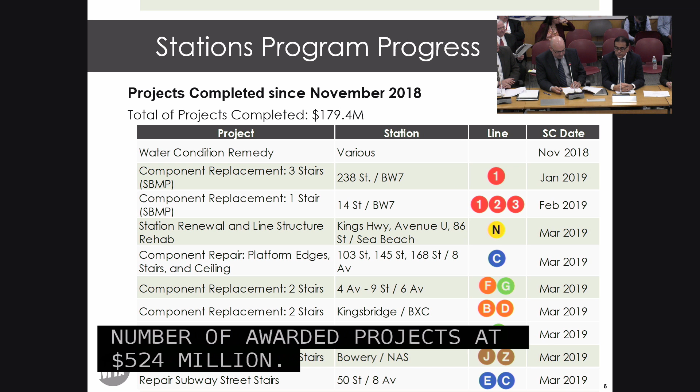This slide shows projects that we've completed since the November 2018 report. Completed projects include 12 stair refurbishment and replacement projects in the Small Business Mentoring Program, and platform edge replacement, stair and ceiling repairs at 3 stations on the 8th Avenue line. Completed projects since November total $179 million.

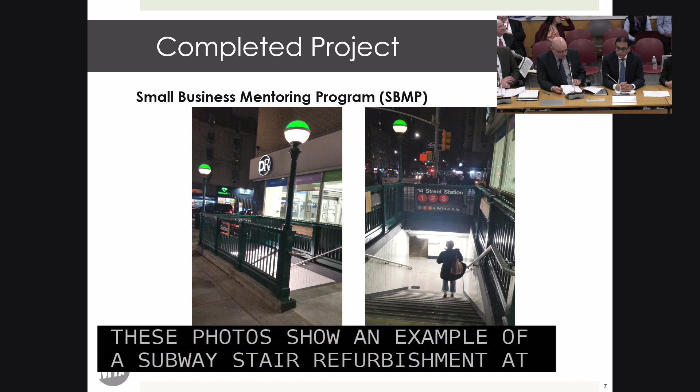These photos show an example of a subway stair refurbishment at 14th Street, Broadway, 7th Avenue as part of the Small Business Mentoring Program. This photo shows an example of an elevated stair refurbishment at the 238th Street station on the Broadway 7th Avenue line, also as part of the Small Business Mentoring Program.

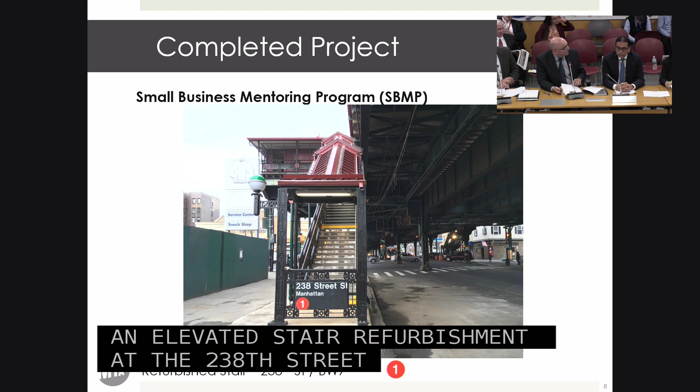This photo shows another example of a subway stair refurbishment at the 50th Street 8th Avenue station, which is also part of the Small Business Mentoring Program.

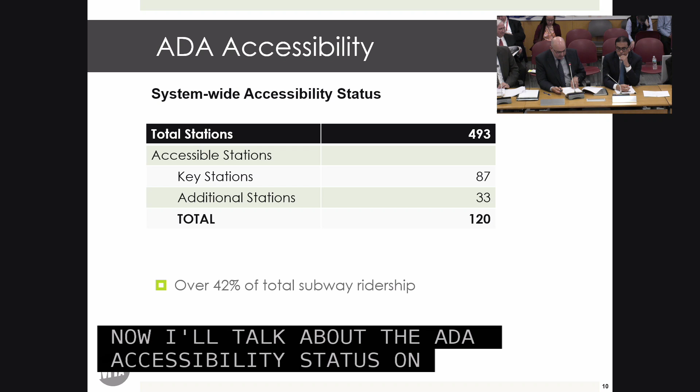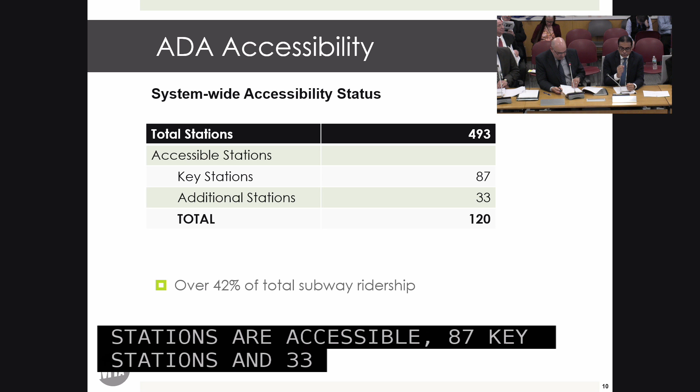Now I'll talk about the ADA accessibility status on these next few slides. Out of a total of 493 stations, including Staten Island, 120 stations are accessible: 87 key stations and 33 additional stations. These stations are utilized by over 42% of the total subway ridership.

For the 13 remaining key stations, 68th Street Hunter College is in final design, and 12 are in construction. Key ADA stations total $883 million.

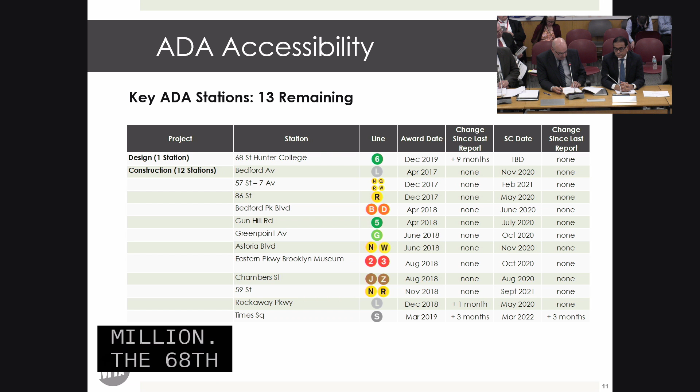The 68th Lexington Avenue station is pending real estate agreement resolutions, as an easement agreement is required with Hunter College for a new street to mezzanine elevator and reconfigured stair within the Hunter College East building footprint, as well as construction agreements to perform construction within the Hunter College property and at 3 sub-basement levels. Negotiations between MTA Legal and Hunter College are ongoing.

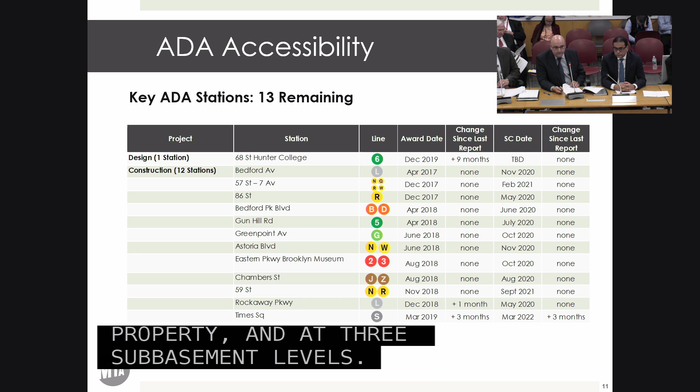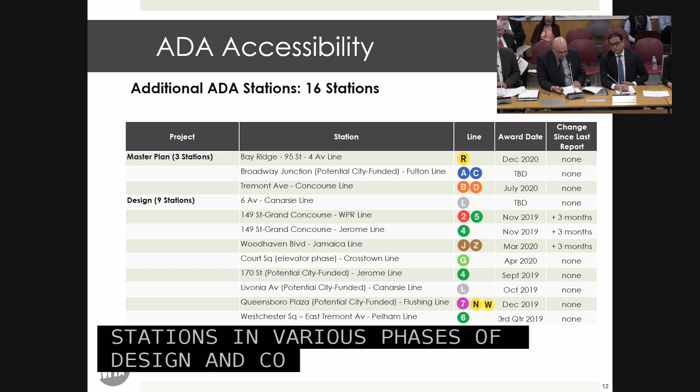In addition to the key stations, we also have 16 additional ADA stations in various phases of design and construction. 3 are in master plan, 9 are in design, and 4 are in construction. The additional ADA stations total $548 million.

The schedule slippage of the New Utrecht Avenue and 62nd Street stations will be discussed later in the report, along with more detail on the Sea Beach Line stations.

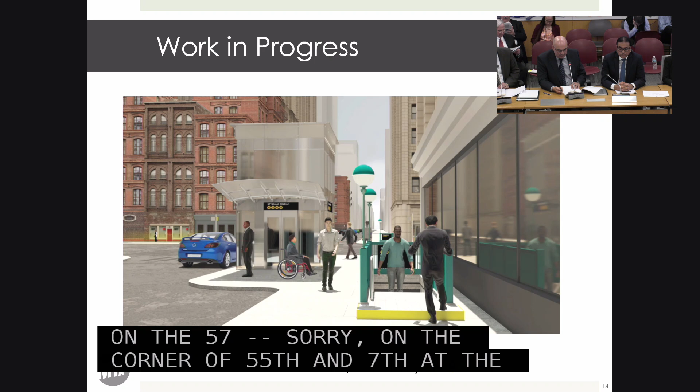This slide is a rendering of our typical street elevator that's under construction on the corner of 55th and 7th at the 57th 7th Avenue station on the Broadway 7th Avenue line. Substantial completion is scheduled for February 2021.

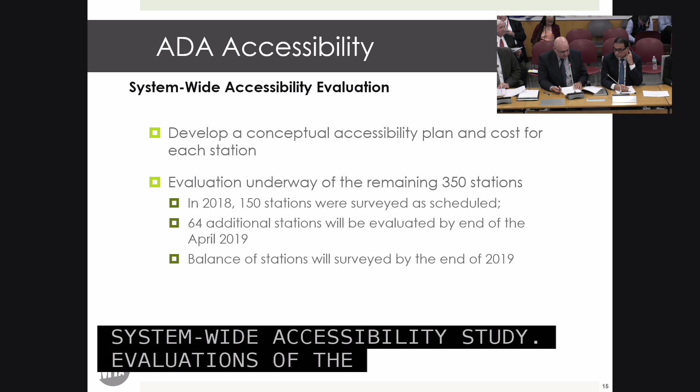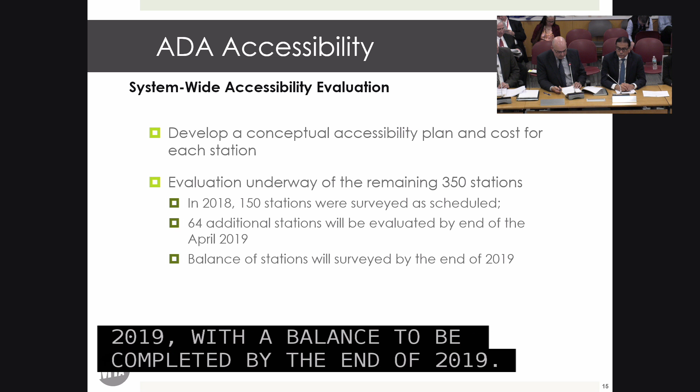These next couple of slides will show the progress of the system-wide accessibility study. Evaluations of the remaining 350 stations remain underway. 150 station surveys were completed at the end of December 2018 as scheduled. An additional 64 stations will be surveyed by the end of April 2019, with the balance completed by the end of 2019. The evaluations develop a conceptual accessibility plan and an order of magnitude cost for each station.

The evaluations will inform the selection of new stations in the next and subsequent capital programs. Upcoming steps include identification of the stations with community input.

A town hall meeting was held on February 6th with the disabled community to identify selection criteria for future ADA stations, which will help inform the selection for the 2020 to 2024 capital program. We will continue to evaluate and advance ADA projects for scoping and design. 15 stations have been referred for design.

We will also advance the Fast Forward Plan strategy of an additional 50 accessible stations, with the strategy of no more than 2 station stops away. With that, Bill Montanil will continue with the report on the Sea Beach Renewal Project and the ESI program.

When you finish the key stations that you have either under construction or under design, and the additional stations, when those are done—those 25 or 30 stations—what percentage of the subway population will now have accessible stations? You indicated before we got to those, we were at 42%. What will the number go to?

I'll have to get back to you exactly on the number. Very good question. We'll update you on that. Thank you. Okay, thank you.

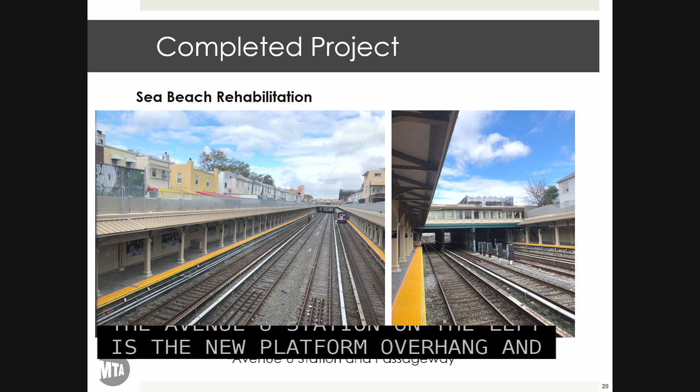These are completed photos of the Avenue U station. On the left is the new platform overhang and retaining wall. Note the backyards of the houses are the actual platform roof. On the right, spanning the tracks, is the control house.

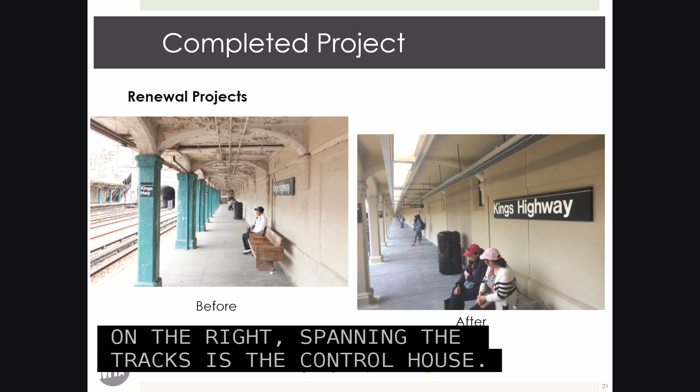These are platform before and after photos. The ceiling has been scraped and painted. Glass fiber reinforced concrete panels have been installed, and new lighting has been installed on the platform.

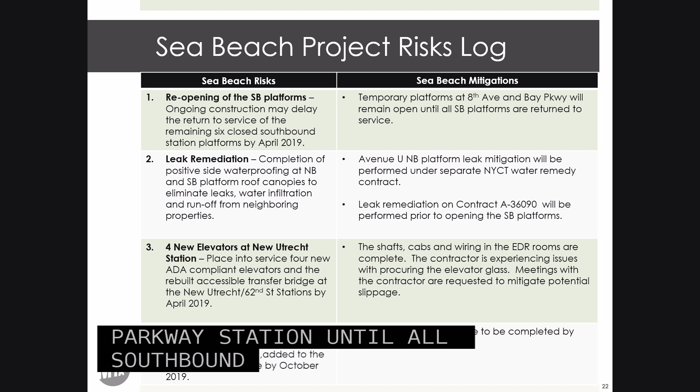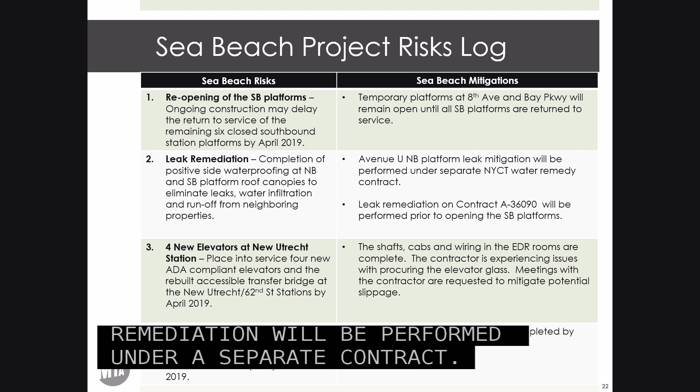Risk and mitigations for the Sea Beach projects are shown on this slide. Regarding Risk 1, temporary platforms will remain at the 8th Avenue and Bay Parkway Station until all southbound platforms have been reopened. Regarding Risk 2, on the 3-station renewal, the Avenue U northbound platform leak remediation will be performed under a separate contract—that's the last one to be done. On the 6-station renewal, leak remediation will be performed prior to opening those 6 southbound platforms.

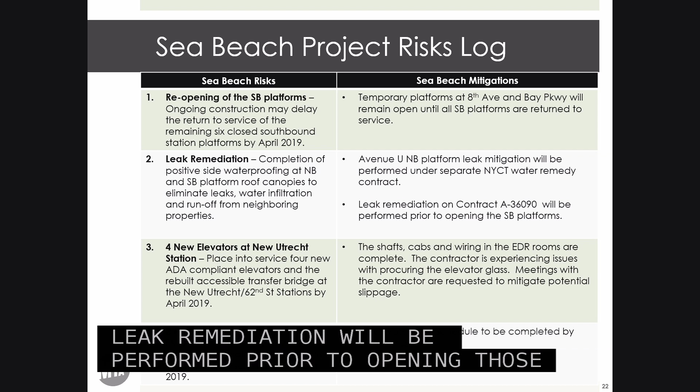Regarding risk item 3, the elevators at New Utrecht Avenue—the contractor is experiencing issues with the elevator glass supplier. Executive meetings and alternate glass suppliers have been provided to the contractor to help mitigate this issue. And regarding item 4, as mentioned earlier, the northbound elevator will be placed in service in October 2019.

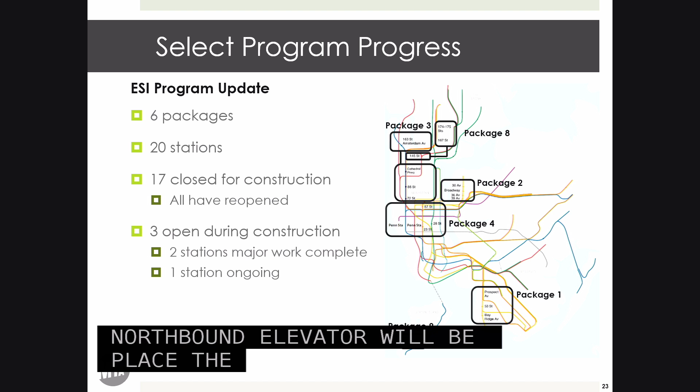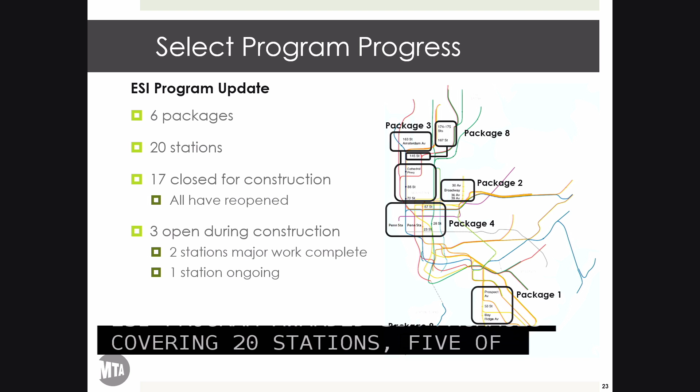Moving to the ESI program, the ESI program awarded 6 packages covering 20 stations. 5 of the packages used the alternative delivery method of design-build, and 1 used the traditional design-bid-build approach, which was awarded to a small business mentoring contractor. Out of the 20 stations, 17 were fully closed for construction for between 128 and 243 days, depending on the work that had to be done.

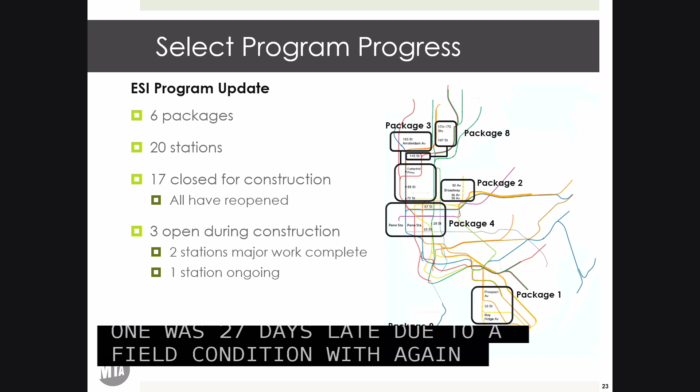I'm pleased to report that all have been reopened. 3 were reopened early, 11 on time, 2 were 1 day late, and 1 was 27 days late due to a field condition with, again, structural steel. 3 stations remained open during construction. Major work at 2 of the stations is complete, and work continues at 1 station.

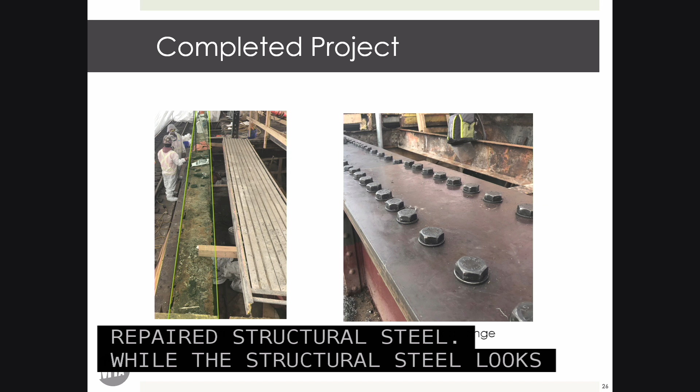While the structural steel looks good now, that wasn't always the case. This is what it looked like before and after. On the left, the green lines represent the outline of where the top flange of the girder used to be. The photo on the right is the repaired top flange when we were done.

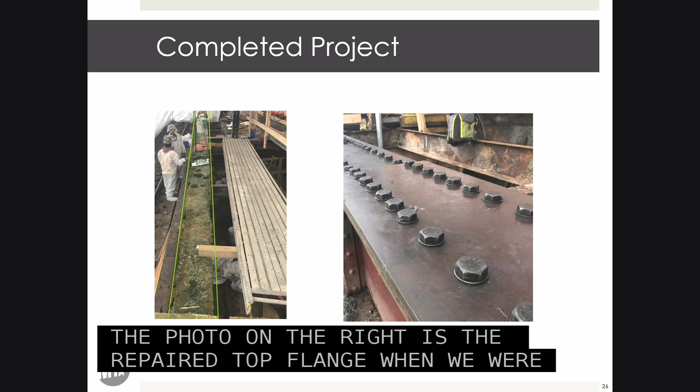The girder top flanges were repaired by removing the deteriorated top flange plates and bolts. 3 new layers of top flange steel plates were installed to reinforce the girder.

Significant deterioration was encountered on the girder web, as shown in the photo on the left. On the right, the girder webs were repaired by removing the deteriorated steel and bolting on reinforcing plates of various sizes. While all this work was performed, other departments took advantage of the track outages to perform work along the line.

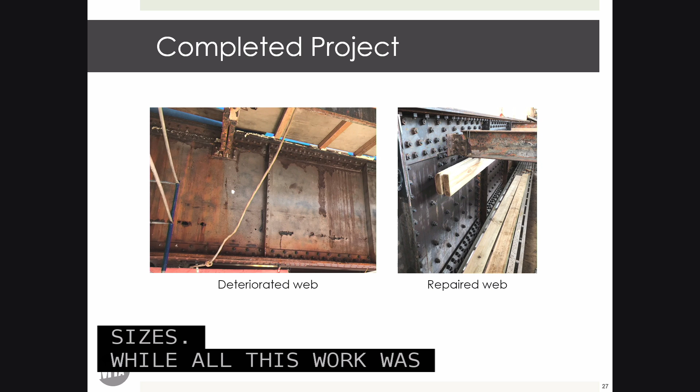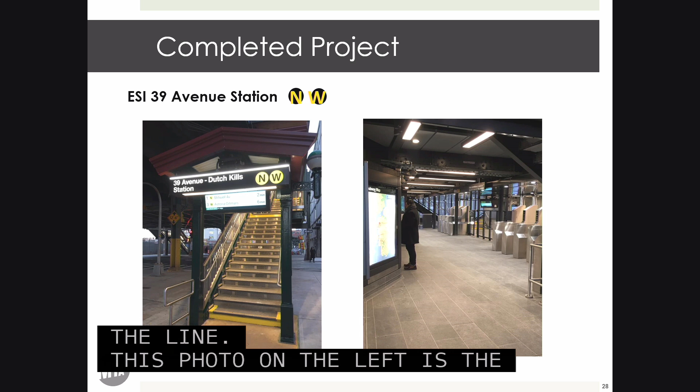This photo on the left is the new countdown clock at the street level, and on the right is the new mezzanine at the 39th Avenue station. This concludes our presentation.

Thank you. Nice job, Mr. Pally.

Do we include now countdown clocks at the street level as a normal occurrence with our renovated stations? That will be added to any station we renovate, yes. Going backwards and going forwards? I don't know about going backward. Going forward? Yes. So any station would automatically get that at the street level? Yes, I believe that is our new guideline now. It was very well received, so it's something we want to do.

We ready for IEC? Yes, good afternoon. My name is Mark Saluka, and I'll be reporting on the IEC's report on Transit's ADA accessibility program.

Please be pithy. I try. New York City Transit highlighted 16 accessibility projects. We'd like to point out that 12 of those 16 projects are included in the IEC's quarterly traffic light report, which can be found on page 80 of your CPOC book. Key performance criteria regarding cost, contingency, and schedule were reviewed, and they're all identified as green, meaning they have no variance exceptions since the last reporting period.

Regarding the other 4 projects, 3 are included in the Sea Beach project at New Utrecht, 62nd and 8th Avenue, and they're monitored separately by the IEC in the Sea Beach presentation. The last project is Times Square, which will be reported on separately by the IEC, also in a separate presentation. That concludes the IEC's ADA report.

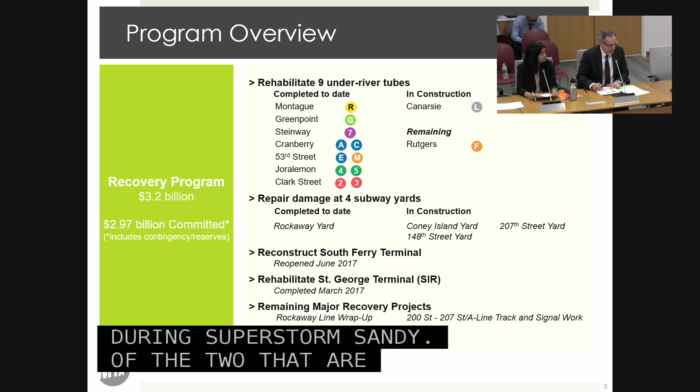In the recovery program, so far we have rehabilitated 7 of the 9 underground under-river tunnels that were flooded during Superstorm Sandy. Of the 2 remaining, the Canarsie Tunnel project is in construction, as you heard earlier today, and the Rutgers Tunnel project will be awarded for construction after the L line project is completed.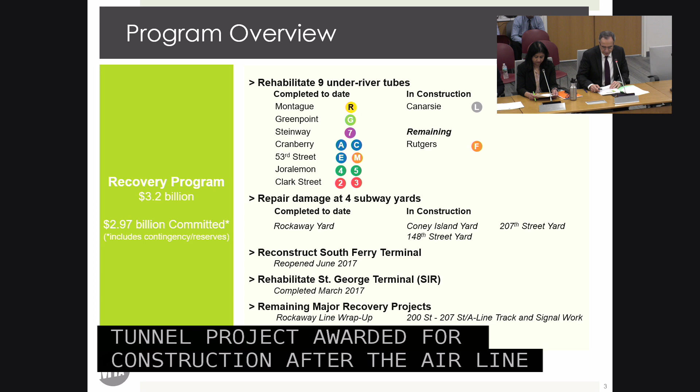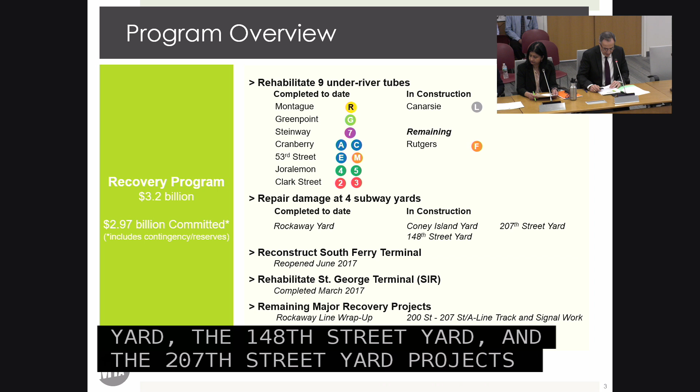We repaired damages at the Rockaway Park Yard, and the Coney Island Yard, 148th Street Yard, and 207th Street Yard projects were awarded last year and are in construction. I will provide more details on the Coney Island Yard project.

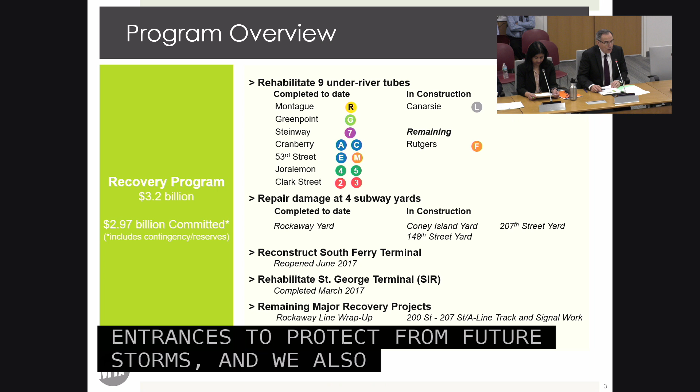We also completed the reconstruction of the South Ferry Station, which included resiliency measures such as installation of marine doors at street entrances and critical facilities to protect the station from future storms. We also rehabilitated the St. George Terminal in Staten Island. All of the completed projects were largely on time and within budget.

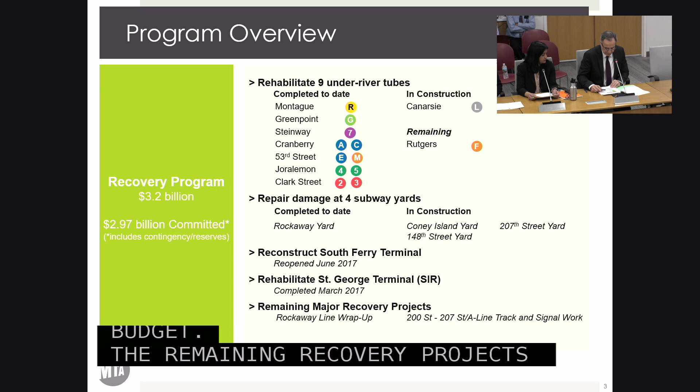The remaining recovery projects include the Rockaway Line wrap-up work and the rehabilitation of the track and signal equipment on the A line between 200th and 207th Streets.

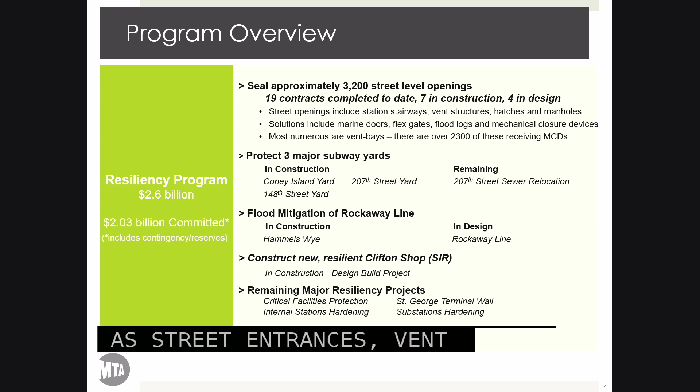On the resiliency program, we are in the process of installing flood protection devices at vulnerable street openings, such as street entrances, vent structures, personnel and equipment hatches, and manholes. All of these devices, including marine doors, flex gates, flood logs, and mechanical closure devices, are custom-made for each opening.

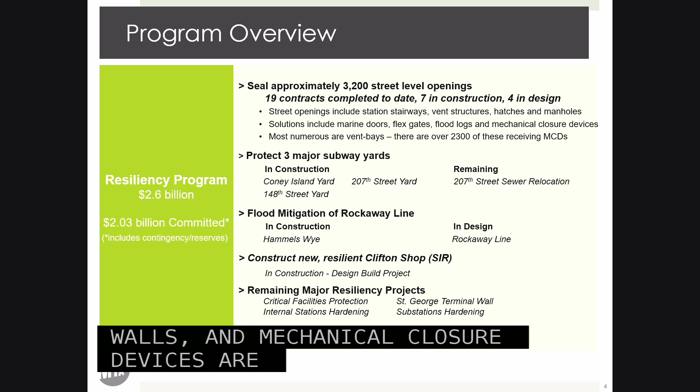Vent bays are the most numerous. There are over 2,300 of these openings, which are receiving easily deployable mechanical closure devices.

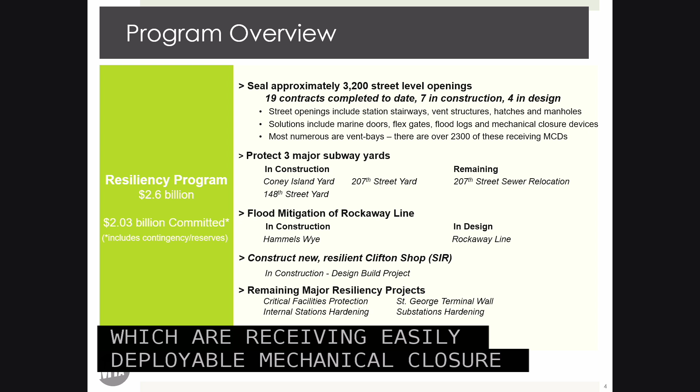The Coney Island Yard, 148th Street Yard, and 207th Street Yard projects that are in construction, which I mentioned on the earlier slide, also include resiliency work as well as repair work. Resiliency work primarily includes the installation of a perimeter wall to protect the yards from future floods.

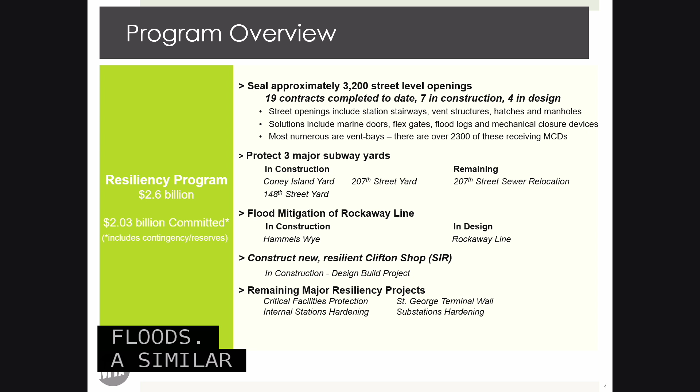A similar wall has been installed at the Hammels Wye facility in the Rockaways, while further protection of the Rockaway subway line over Jamaica Bay is being developed.

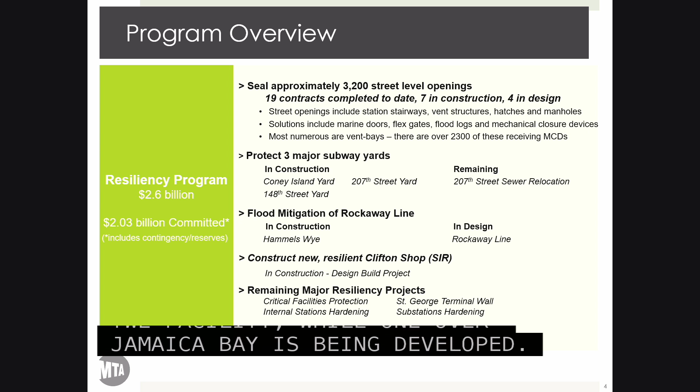Also, a design-build project to construct a new resilient Clifton car maintenance shop in Staten Island is underway, and Sonia will provide more additional information about that project.

Upcoming resiliency projects include critical facilities protection, St. George Terminal perimeter wall, internal station hardening, and substation hardening.

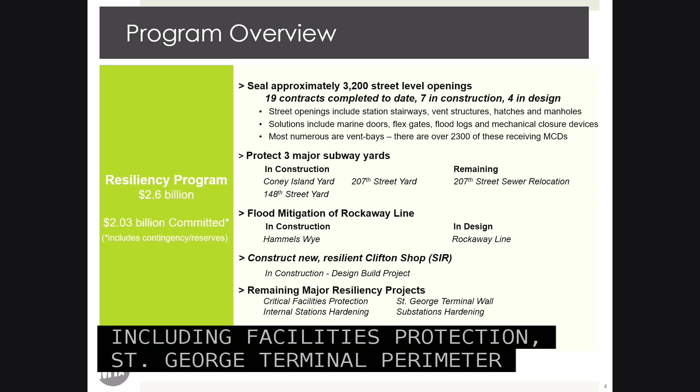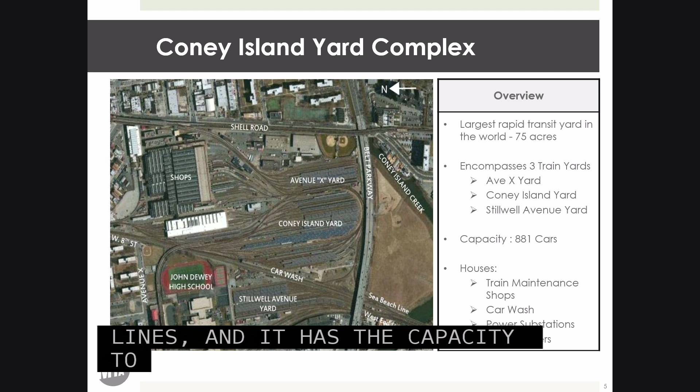The Coney Island Yard complex is the largest rapid transit yard in the world, covering over 75 acres. It includes 3 subyards serving 6 subway lines, and it has the capacity to store over 880 rail cars. It houses 4 train repair shops, a rail car wash, and various equipment and support facilities.

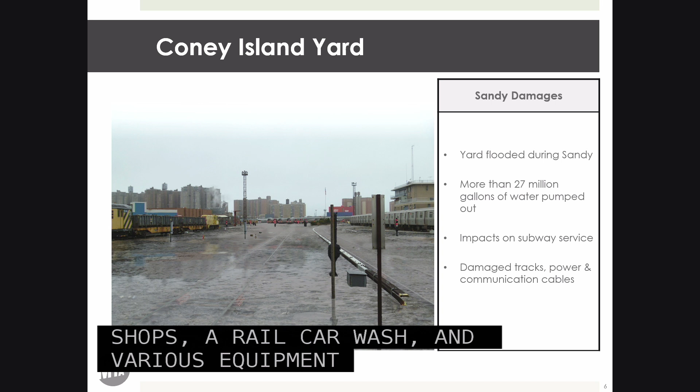The yard was flooded during Superstorm Sandy, affecting service and damaging tracks and power and communication cables and equipment.

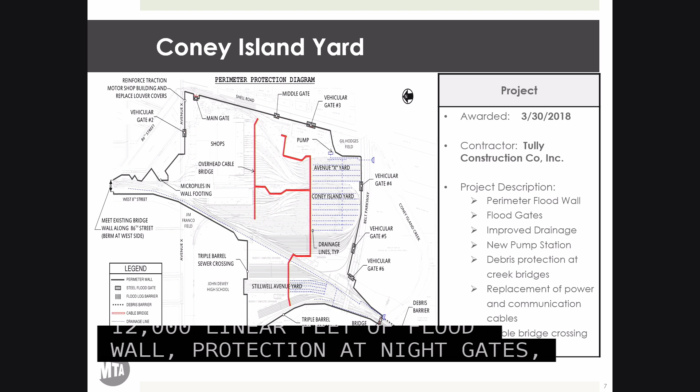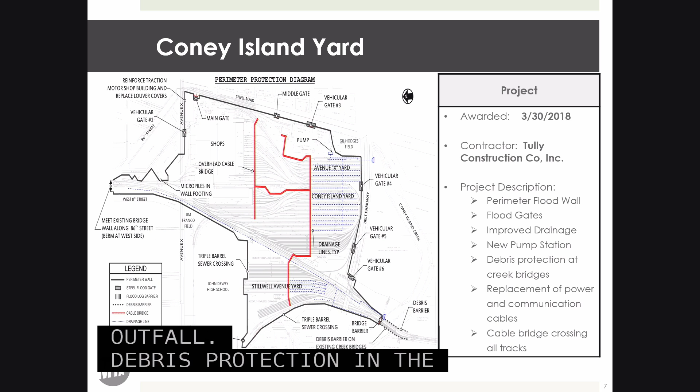The Coney Island Yard project was awarded to Tully Construction in March of 2018. The project involves the installation of approximately 12,000 linear feet of flood wall, protection at nine gates, hardening of the traction power motor shop, installation of new and improved drainage, a new pump station, an additional outfall, debris protection on the creek bridges, as well as the construction of a bridge that will carry power feeders and communication cables across the yards.

The project is approximately 7% complete and is on schedule, although 20% of the time has elapsed, which is typical at the start of any such project. The contractor has mobilized, is performing surveys, test pits, submittal packages, and acquiring permits and materials. He has started the fabrication of the cable bridge and installation of the flood wall.

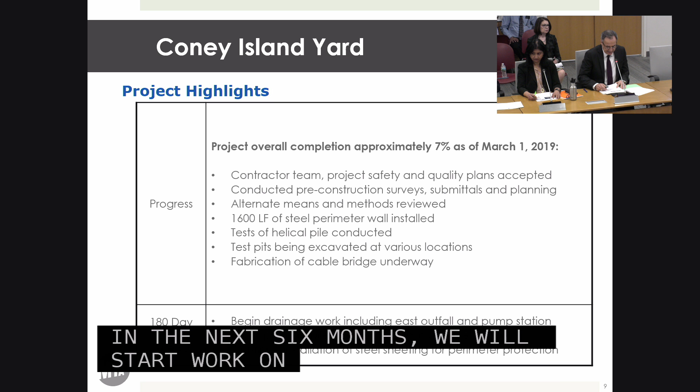In the next 6 months, we will start work on the drainage elements, like the outfall and pumping stations. The contractor will also begin the installation of piles for the cable bridge foundations, and he will continue installing the perimeter wall.

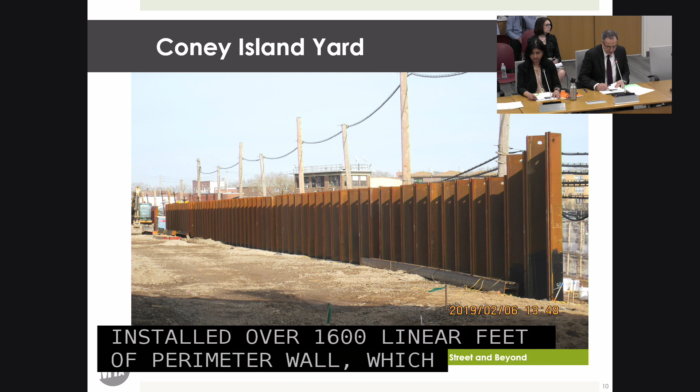So far, the contractor has installed over 1,600 linear feet of perimeter wall, which ranges in height from 8 to 14 feet and is driven approximately 30 feet below ground.

These photos show the test of the helical piles, which were going to be used for the foundations of the cable bridge. The tests were successful, and now the contractor can begin with the installation.

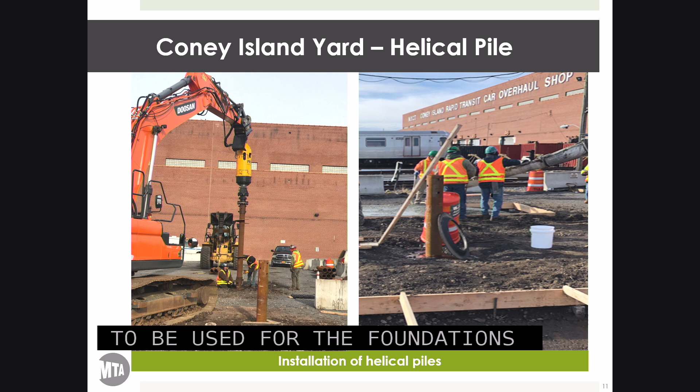Here's an image of the fabrication of the cable bridge, which is being assembled off-site at the contractor's facility and will be delivered to the yard in 60-foot sections.

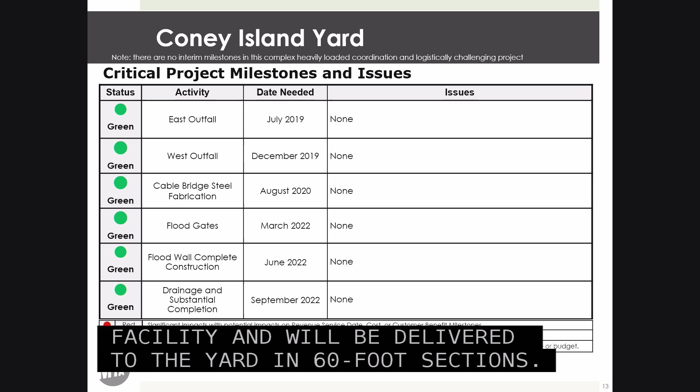All project milestones are on schedule, and there are no issues. That concludes the presentation on the Coney Island Yard.

So, Branko, you mentioned improved and new drainage for the Coney Island Yard. Into where will that drain? That will drain into the Coney Island Creek, which then drains into the ocean.

Right. But the pumping system would be able to overcome the pressures if there was a flood, so the pumping system would be able to pump it out.

And are we going to have the similar kind of drainage from trains that are stored that we have had at Sunnyside Yard, for instance, in Queens? Or is there some sort of cleansing that happens before it gets put into the ocean?

The cleaning facility, the car wash, has its own mechanism for filtering. I'm thinking of engine oil and all sorts of things like that. Is there any? I will have to check to see what the design shows for that.

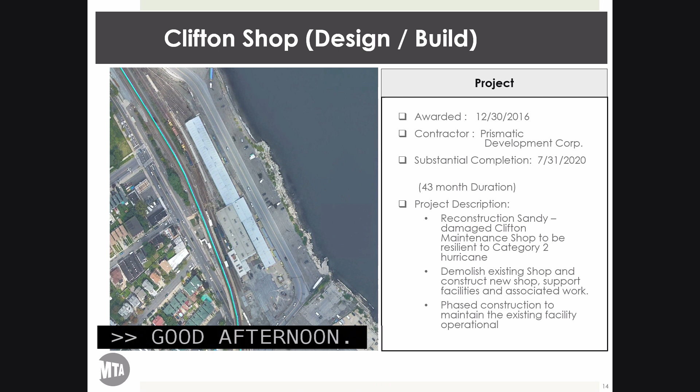Good afternoon. The Clifton Shop Design Build contract was awarded in December 2016 to Prismatic Development Corporation with a 43-month construction duration with a substantial completion date of July 2020.

This is the first design build where the existing shop remains operational through construction. The existing shop will be demolished once the new shop is operational.

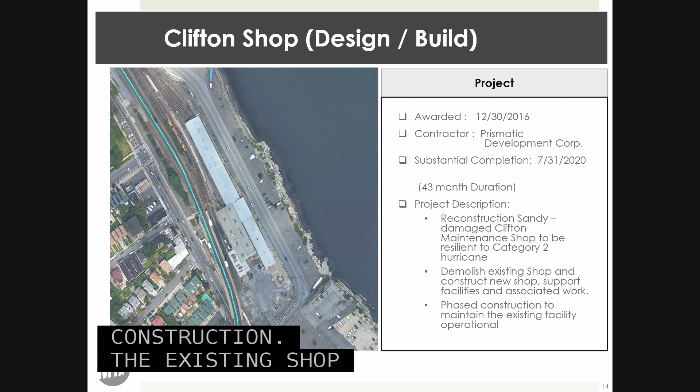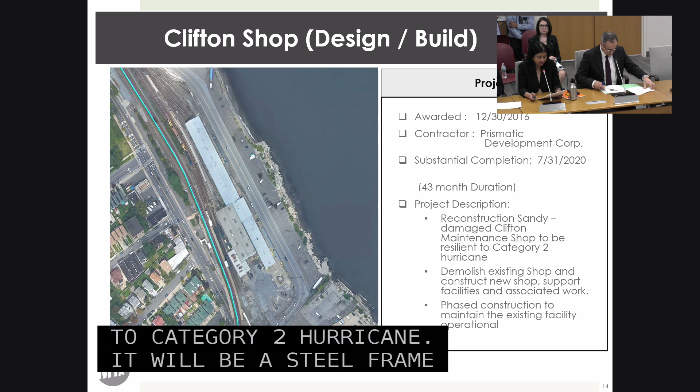The new shop will be resilient to a Category 2 hurricane. It will be a steel frame building with a 4-track maintenance shop with admin offices, support rooms, and employee facilities.

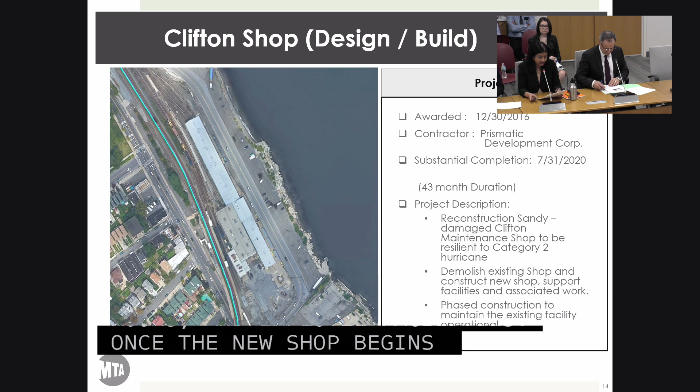Once the new shop becomes operational, the existing offices of Staten Island Railway will be relocated from 60 Bay Street to the new facility when completed.

Project status: the current project schedule shows a 10-month delay, a slip of 7 months since we last reported in the CPOC report of July 2018.

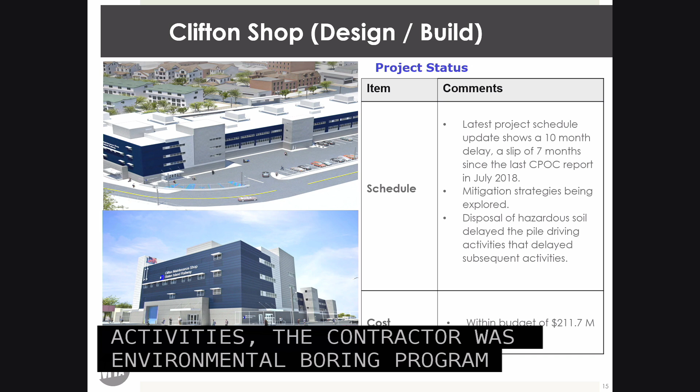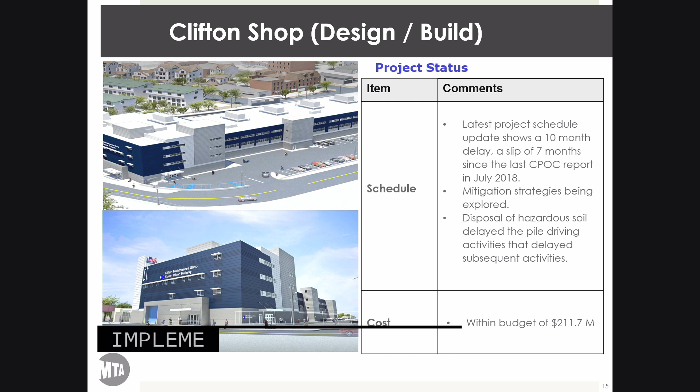Prior to the start of excavation activities, the contractor was required to prepare an environmental boring program to manage waste from the project. During the course of its implementation and testing protocol, hazardous soil was discovered in several areas at the site. This delayed the start of pile driving activities and subsequent activities to follow.

A change order has been issued to the contractor for the disposal of 1,000 tons of hazardous soil for a price of $311,000. New York City Transit is currently performing its schedule analysis, and the contract may be extended based on its findings.

A lesson learned from this project is that we plan to take samples and test soil that was disturbed prior to the award of future contracts.

We will also include a unit price line item in contracts for the removal and disposal of historical fill and hazardous soil. Currently, the project is on budget, and we will review the costs at 50% completion to evaluate all needs as appropriate.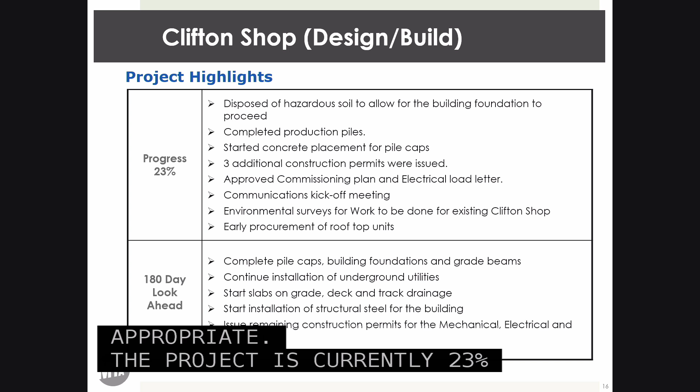The project is currently 23% complete. The contractor has disposed of the hazardous soil, and all production piles have been driven.

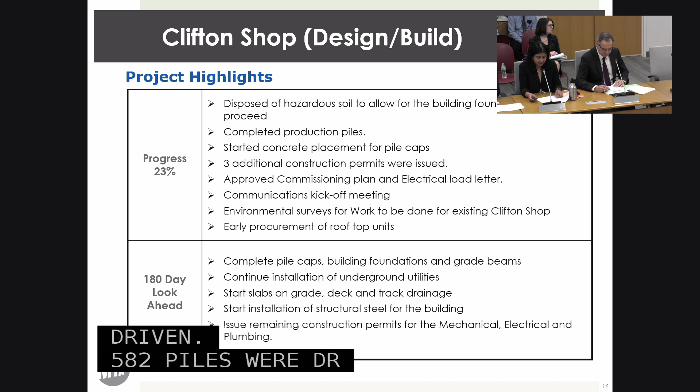582 piles were driven. Concrete work for the pile caps has started. To date, 370 cubic yards of concrete have been poured. Trenching for underground utilities has started.

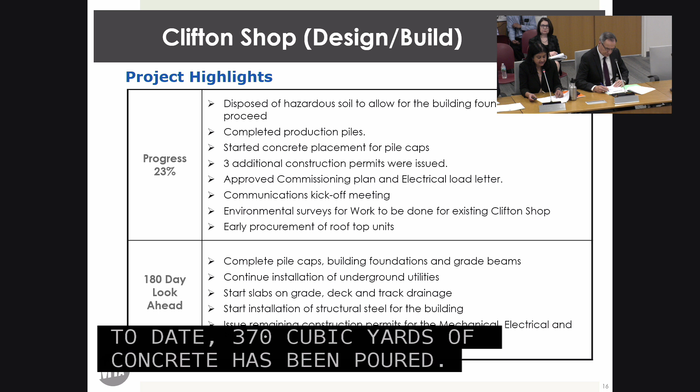In the design stage, 3 additional permits have been issued since the last CPOC report of July 2018.

Upcoming activities for the next 6 months: all pile caps, building foundation, and grade beams will be poured. We will continue the installation of underground utilities and start the erection of structural steel.

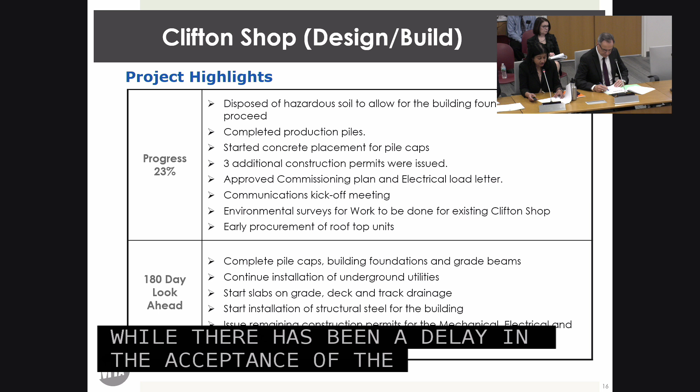While there has been a delay in the acceptance of the mechanical, electrical, plumbing design package, construction permits for several tasks have been issued, some of which were on the critical path. New York City Transit and the contractor are working together to resolve any outstanding issues to minimize any further impact to the schedule.

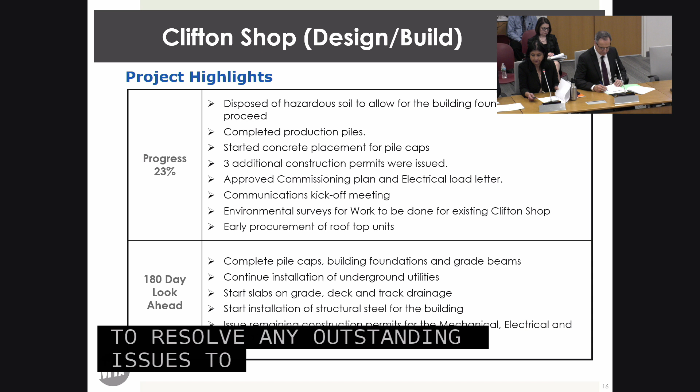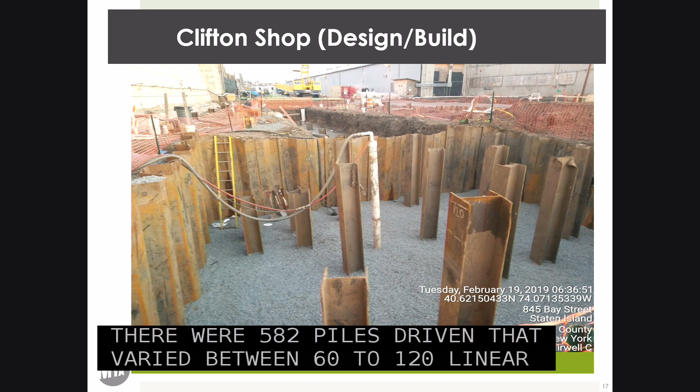Are we done? As mentioned earlier, all production piles have been installed. There were 582 piles driven that varied between 60 to 120 linear feet. The contractor at a given time used 3 rigs for pile driving activities.

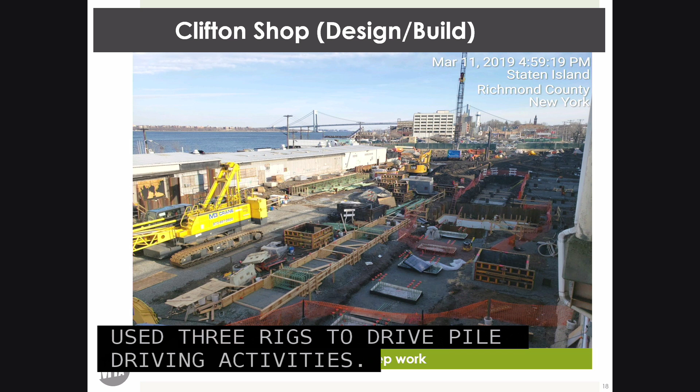This slide shows the prep work of concrete pour prior to the pile cap installation. As you can see, there's a crawler crane with a boom shown on the left of the photo that is being used to pour the concrete.

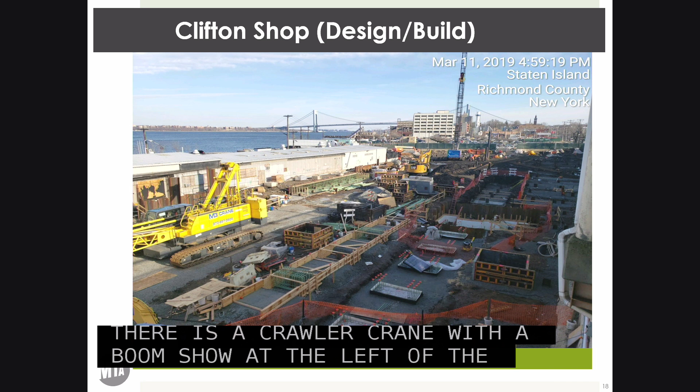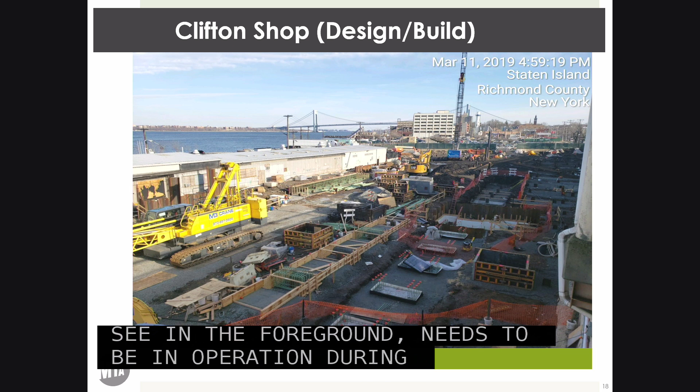130 pile caps and 100 grade beams are needed for the new facility. Clifton Yard, the site, is very long and narrow. The existing shop, which you can see in the foreground, needs to be in operation during construction. Vehicular access is difficult and the site cannot accommodate too many work vehicles at the same time because of the ongoing construction activity.

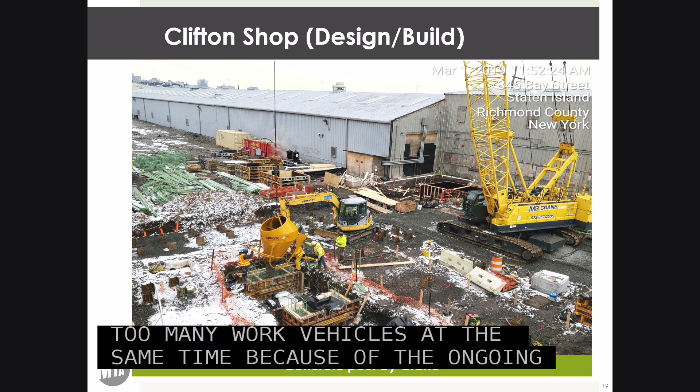This is a typical concrete pour for the pile cap. Here, because of the site constraints, the contractor had to use a boom crane to pour the concrete.

To conclude, we've installed 582 piles that have been driven. The delay is approximately 5 months due to the disposal of hazardous soil and additional time that was required for pile driving activities due to longer piles needed to support the building load.

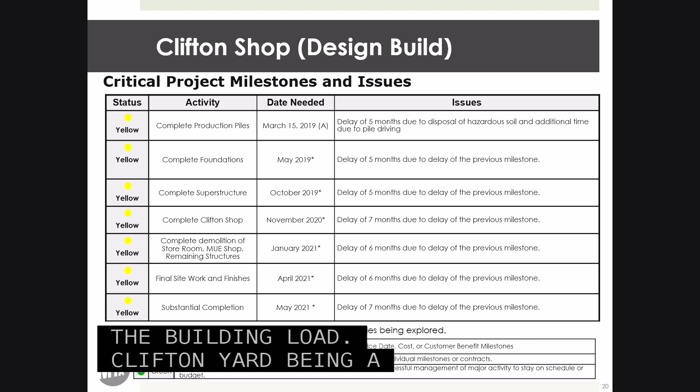Clifton Yard, being a small and narrow site, has all other major work activities sequential due to site constraints. The milestones subsequent to the installation of the production piles listed above project a sequential delay.

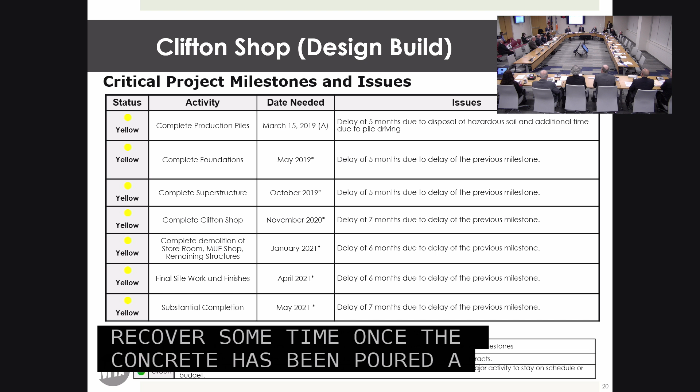Prismatic performs their own concrete and excavation work with its own force. We anticipate that we can recover some time once the concrete has been poured and the slab has been poured. Multiple trades can then work in parallel within the building footprint.

Every effort has been made to mitigate the delay, such as resequencing work, extending long overtime hours, and pushing submittals to an earlier date. The building commissioning plan has been approved.

The communication systems kickoff meeting was completed and accepted. Major equipment like the heat recovery units have already been procured and stored at an off-site location, ready to be installed parallel to the structural steel erection. Environmental surveys that were needed for the existing shop have already been completed.

This concludes my presentation. Thank you.

The IEC report for the Coney Island Yard project can be found starting on page 61 of the CPOC book. As reported by the agency and based on the IEC's review of the project schedule, the substantial completion date remains September 2022. The first update to the baseline is currently under review.

The IEC reviewed the project's total budget. Based on a review of the associated design, construction, and soft costs, the IEC concurs that this project is within budget. The IEC participates in monthly risk management meetings with the project. The project has effective risk mitigations in place to control the top project risks.

This concludes the IEC's comments on the Coney Island Yard project. Thank you.